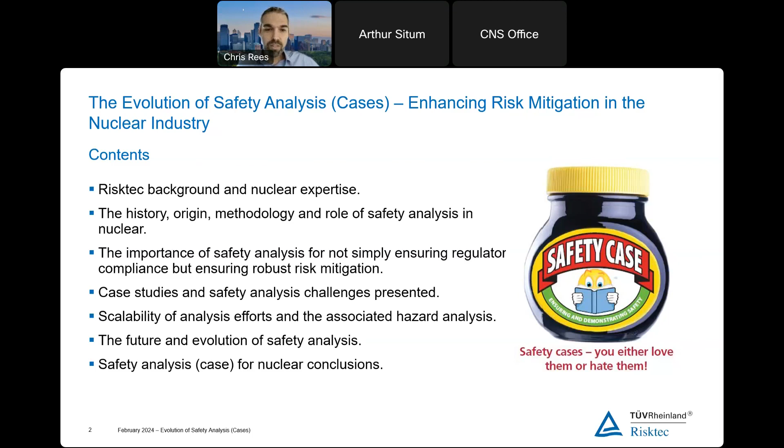I like this little picture here. So yeah, my accent, I am based in Canada, but I am from the UK originally, as Arthur said. So I'm very much a big fan of Marmite. If you do see Marmite in the supermarket, you're supposed to either love it or hate it. And similarly, I think, with safety cases, you either love them or hate them. So by the end of this presentation, hopefully you'll love them a little bit more.

So, Risktec Solutions Canada. I'm based out of Calgary, and we've been operating in Canada since 2011. And we have a number of offices in North America.

Some facts about us. We currently have over 300 full-time employees, 16 offices across the world. We work across a number of industries, so transport, defense, nuclear, clean energy, oil and gas. So we work with various different companies and clients on high hazard, high risk industries. And we'll talk about some of the nuclear examples today.

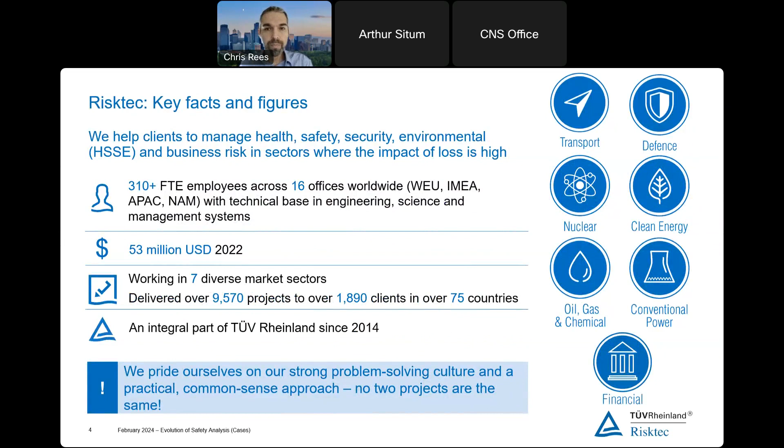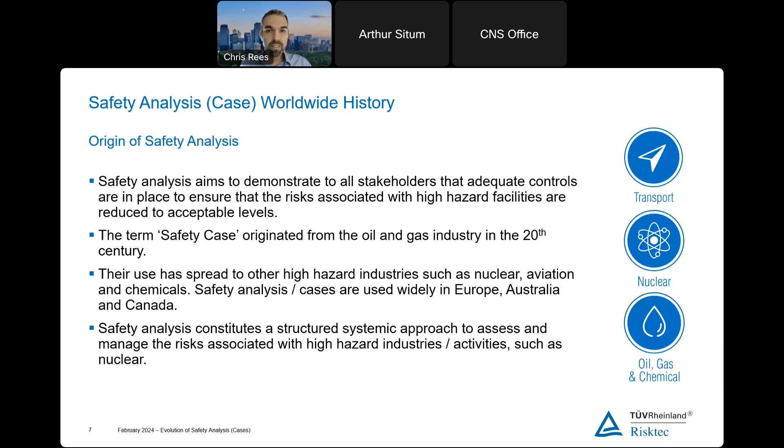Now, looking back to the late 1980s, Piper Alpha was an offshore oil platform operated by Occidental, I think that's how I say it, I probably said that wrong, Petroleum in the North Sea. At the time, it was one of the largest and most complex platforms in the North Sea. And on the 6th of July 1988, an explosion and fire destroyed the platform completely, killing 167 of 226 crew on board.

Now, the explosion itself was caused by a leak from a pump that was temporarily removed for maintenance, and there were several factors that contributed to the incident, including inadequate safety procedures, lack of proper communication between staff and in emergency arrangements, the design of the platform, so the location of the crew quarters was in close proximity to operations and the explosion itself, and the emergency response systems and actions.

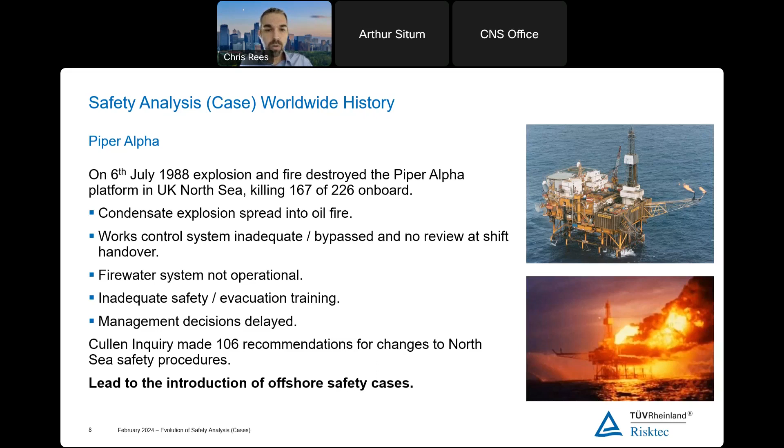Following this, the Cullen inquiry made 106 recommendations to the North Sea safety procedures, and the disaster prompted significant changes in regulation and practices, leading to the introduction of safety cases. So that's why Piper Alpha is important. That is where the modern term safety case or safety analysis really comes from. And just a couple of the photos here. The top right one shows Piper Alpha before, and the bottom one, Piper Alpha during the fire and explosion. So quite a catastrophic incident.

So following on from Piper Alpha, we saw safety cases and safety analysis being brought in across a number of different industries, including the UK Ministry of Defence. Now, again, it's important to learn how the evolution of safety cases progressed by looking at some of the incidents. So the Nimrod MR2 was a Royal Air Force or RAF maritime patrol aircraft, shown here in the picture. Now, it had a safety case for operations and subsequent safety analysis to support that, and risk management, risk assessment, and safeguards.

On September 2nd, 2006, the Nimrod was on patrol in Helmand province in Afghanistan, and it suffered a catastrophic mid-air fire. And this was only minutes after it had completed air-to-air refueling, and it led to the complete loss of the aircraft and the death of 14 on board.

So the explosion itself was attributed to the fuel system, namely fuel leaked onto a hot element. And the inquiry concluded that the safety case for Nimrod was fundamentally flawed, and effectively it was just a paper exercise. You know, it's a large stack of paper. There was little control for modifications on the system, maintenance, or true safety oversight from the Ministry of Defence.

Further, the inquiry recommended that safety cases should be renamed as risk cases rather than safety cases, and that they should be shaped, so they should be succinct, they should be homegrown, they should be accessible and proportionate and easy to understand and document light, so not safety case in paper. And they recommended the simple definition of a risk case as a reasonable confirmation the risks are ALARP, or as low as reasonably practicable levels.

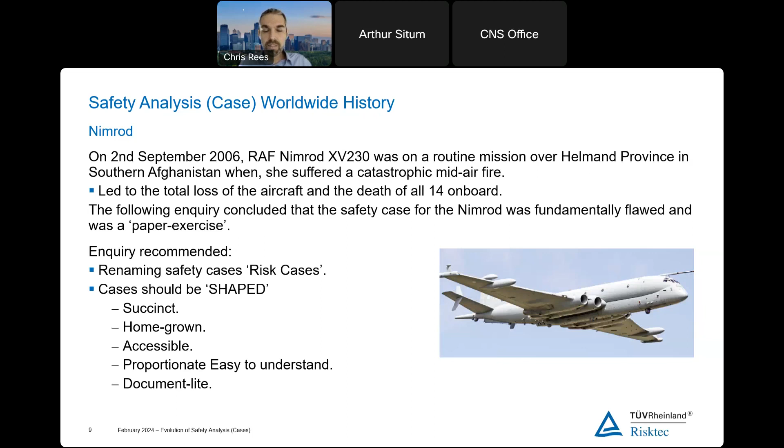So safety cases, we need to understand the evolution to understand where we are, to understand where we're going, and Piper Alpha and Nimrod are some of the key incidents that lead us to where we are now. So since the creation of safety cases, there have been many myths or misconceptions about safety cases, some reflecting the difficulties in the 1980s and 1990s, and then later, and the incidents like Nimrod and Piper Alpha that we discussed.

So further, there is this conception that the safety analysis that you do is just for the regulator, where in reality, the case is developed by the operator, for the operator. At the end of the day, we all want our staff or our employees to go home safe, and that safety analysis is part of that, irrespective of what you're demonstrating to the regulator. So safety analysis represents good practice.

It is the working document to improve safety produced by those who have the most knowledge. That's one of the key things. It's produced by people who understand the plant, understand the operations, the plans, the build, etc.

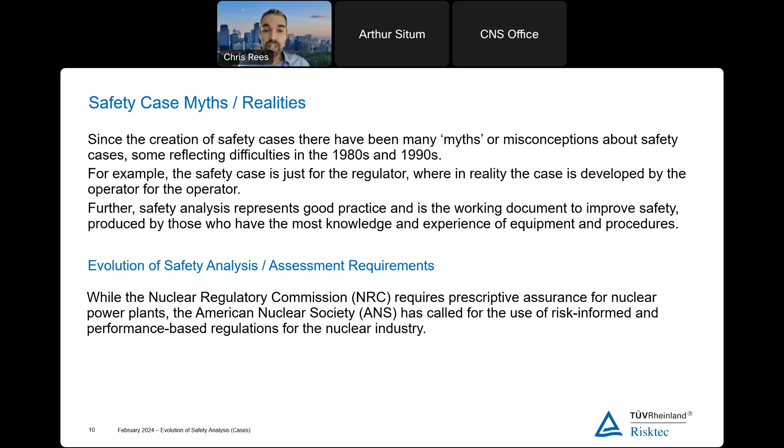So while in the US, the NRC still requires quite a prescriptive approach for nuclear assurance, the American Nuclear Society recommendations have called for risk-based, performance-based regulations. So we might see that starting to evolve, and we do see that starting to come in more, arguing that risk-informed regulations use insights from probabilistic risk and things like that to focus safety resources on the most risk-significant issues, thereby achieving an increase in safety while simultaneously reducing unnecessary regulatory burdens. So we're not sending everything to the regulator, we're actually doing some deterministic assessment as well.

So where do we sit at the moment in the Canadian nuclear market? So current safety analysis in Canada. I'm sure some of you on the call will be aware of the regulatory regime and how it sits, but for those that are not, this is an overview. So Canadian nuclear sites are governed by the CNSC, the Canadian Nuclear Safety Commission, and that sits under the Nuclear Safety and Control Act. So the CNSC provides the regulatory guides for licenses and how to comply with regulatory requirements.

So if you're operating a nuclear site, how do you comply with the regulatory requirements? How do you get a license to operate? The safety analysis for a proposed activity or facility is covered by the CNSC REGDOCs. So they include advice on hazard identification, safety measures, etc. And all nuclear site operators in Canada must present a strong case to obtain a license from the CNSC.

And the safety case is part of that, and that includes the documents on how the regulatory requirements are met or exceeded. These documents cover all the major safety areas such as physical design, human performance management, safety analysis, waste management, radiation protection, etc. And then the safety case needs to be maintained and updated through the facility's life cycle. So that might be construction, that might be operation, that might be decommissioning. And the assessment will include both a deterministic and a probabilistic safety assessment.

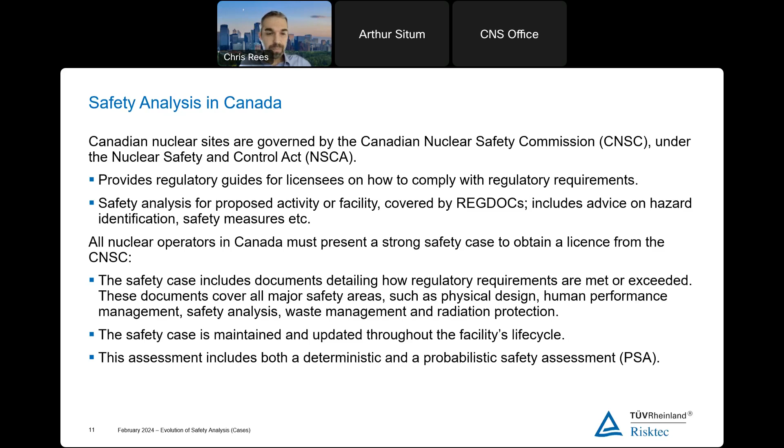So how do we actually go about the safety analysis? So we know that we need to produce a strong case that shows why all our control measures are identified, all our hazards are identified. So this section will discuss the methodology for safety analysis, presenting a systematic and a comprehensive approach to hazard identification, risk assessment, and identification of safety measures.

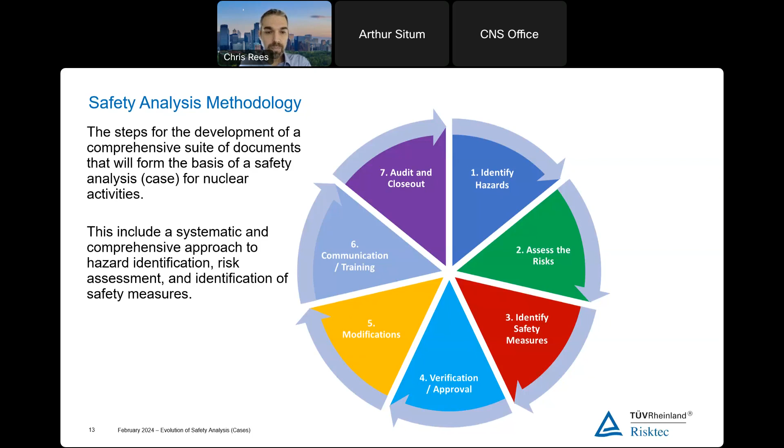So step 1 is hazard identification. We're identifying the potential hazards associated with operation of the system or the plant. This can be done by various hazard identification techniques, such as HAZOP, FMEA, SWIFT. FMEA is failure modes effects analysis. SWIFT is structured what-if technique, so asking the questions, what if this happens, what if that happens.

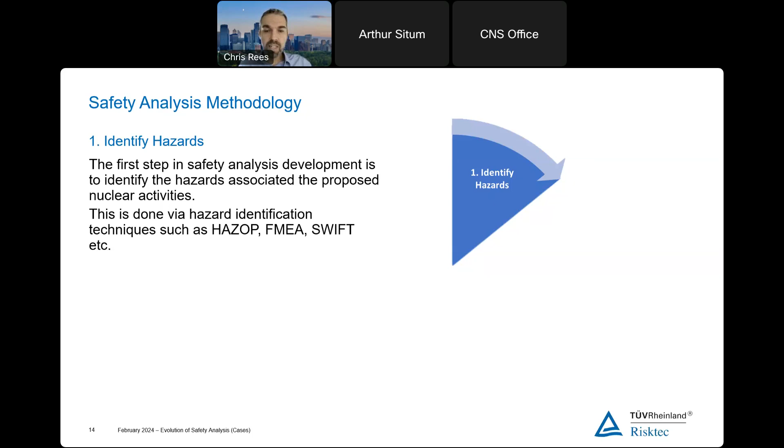These various hazard identification techniques are scalable to the level of hazard presented from the proposed activities, and we'll talk a little bit more about that later in the presentation, but that becomes key going forward and for best practice safety analysis.

So step 2, risk assessment. We're going to assess the likelihood and the consequences of the identified hazards, using deterministic or probabilistic risk assessment. When we say likelihood, we mean how often is this going to happen a year? Are we going to have an aircraft impact once a year, or is it going to be once in 10,000 years? Are we in an earthquake zone?

Are human operators going to get things wrong? We're flawed as humans. We get things wrong quite a lot. So what's the performance? What's the likelihood of things actually happening? And then the consequence: what's the radiological consequence, in this case, for nuclear?

Specifically, we would then look at deterministic and probabilistic risks to see where we can screen things out. So deterministically looking at them, and then when perhaps we can't, looking at the probabilistic risk to determine the tolerability of the identified hazards.

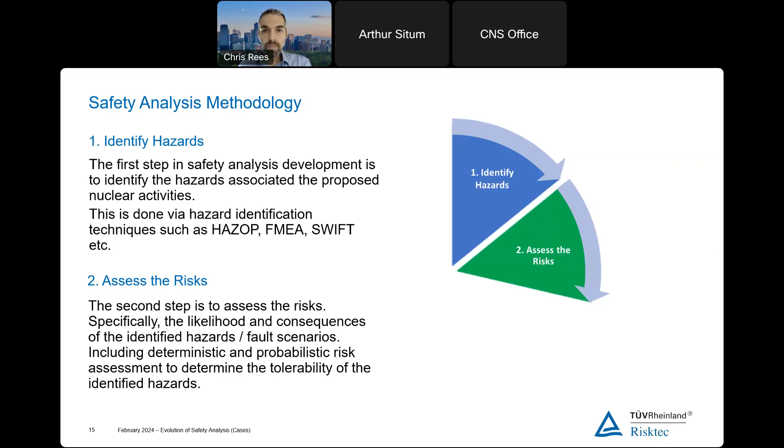So step 3, identification of safety measures. We need to establish the safety requirements and the standards based on the level of risk associated with hazards. If we have something that's very low risk, low hazard, we're not going to have a very robust safety measure against it because it's not required. It might be something procedural, etc.

If we've got something that's high risk, high hazard, then we may have engineered controls, we may have shielding in the case of radiation, things like that. So we have to scale those safety requirements and safety measures partly to what's required to bring the doses down to acceptable levels, but partly for regulatory requirements as well. So here we would identify, assess, and implement those safety measures and controls to mitigate the identified hazards and record that in our safety analysis.

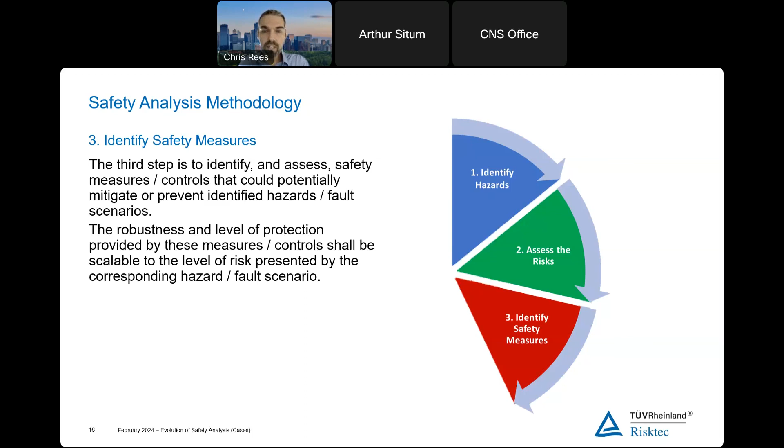So step 4, one of the key ones. We've produced the safety analysis. We've started to build our case of why our plant or activity is safe. Then we need verification: independent review and verification of the assessments and case. And then we look for regulatory or internal approval of the case as well.

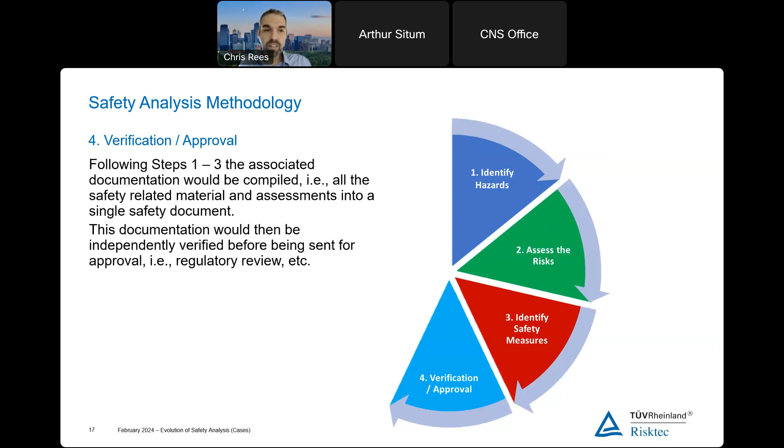And then step 5. We've got our case, we've done our internal verification, but then the design changes, the plant changes, the activity changes. So we need to implement a process to review the status of the case or the analysis and ensure that it remains live. Keeping that case or analysis live forms a crucial part of the process, because any modifications to the proposals of the plant can change what we previously said. So we need to ensure that we keep that case live, we actually access it, we actually keep it up to date.

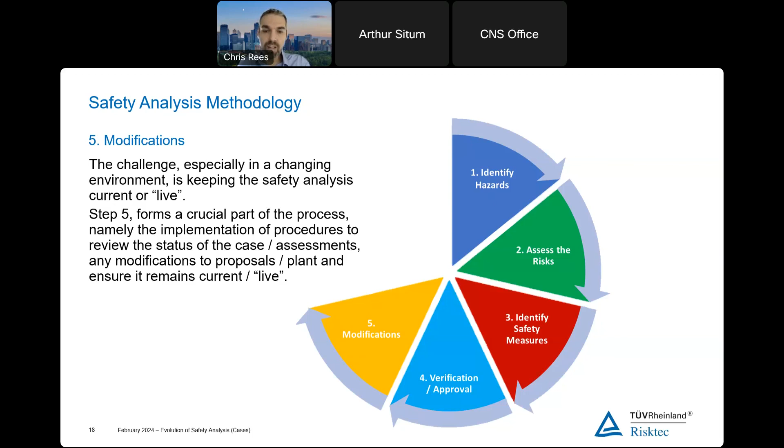And then communications and training, step 6. So communication of the safety measures and claims from the case to the key stakeholders. We'll talk a little bit more about this later on, but if we make claims from the analysis that an operator is going to do X, Y, and Z, they need to be aware of that. We need to communicate to our stakeholders what we're going to do, what safety measures we have, and how we actually perform.

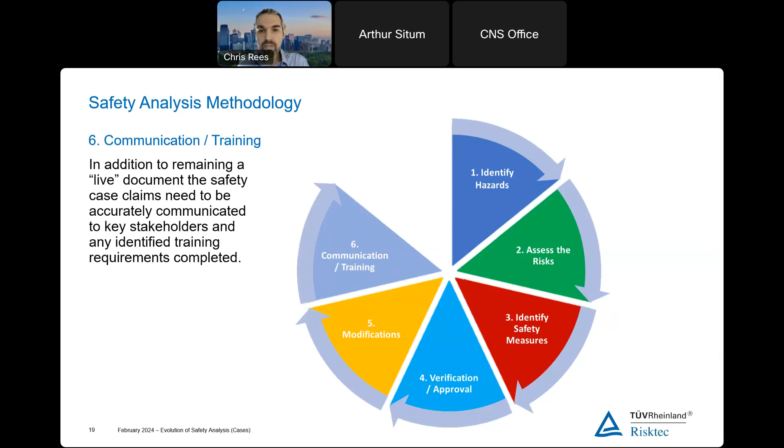And then the final step of the analysis of the case is the closeout: the closeout of the case itself and the associated documentation. This ensures that the current state of the plant, the systems, etc., is captured and any claimed safety measures are removed, so we're not leaving things onerous for the future. Further, the lessons learned from the project are captured for future works. And then documentation: we can compile all that safety case documentation, and we can finally close it out.

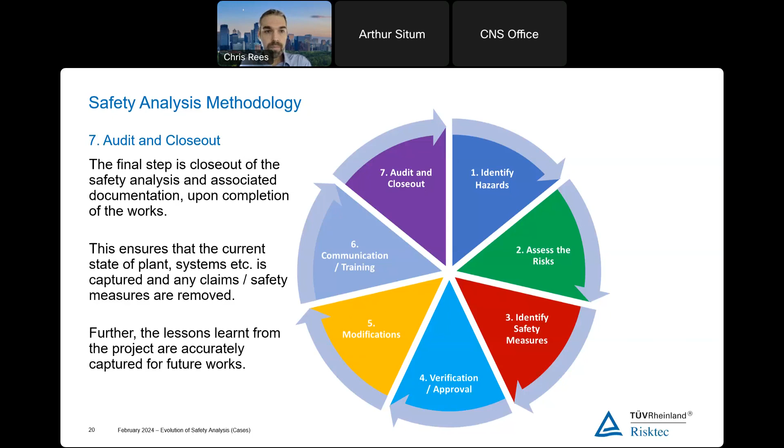Okay, so we've spoken a little bit about setting the scene, where we are, how to get best practice, and how we actually do safety assessments.

We've got a number of case studies today that we'll talk through and some of the safety analysis challenges behind that. So the first one is a site that I worked at. So this is Hinkley Point in Somerset in the UK. We were talking about the interim storage facilities and the safety cases behind that for Bradwell, Berkeley and Hinkley Point nuclear sites. And this is the first interim storage facilities for Magnox, who operate the sites.

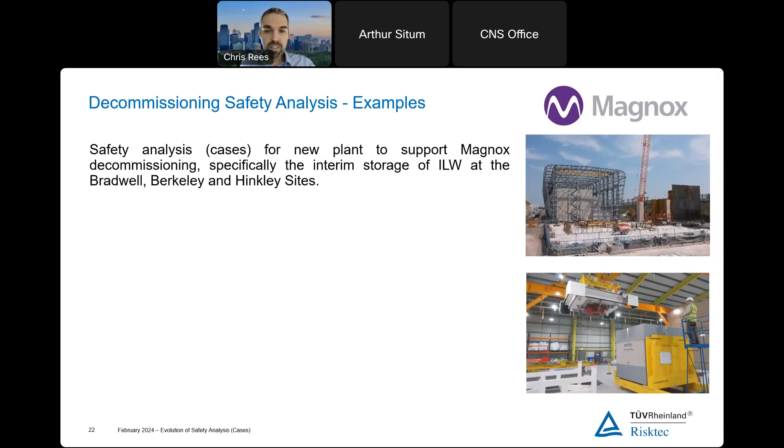So Magnox Limited, they've just rebranded as Nuclear Restoration Services, but they constructed these stores when they were still known as Magnox. They're responsible for safely decommissioning the first generation of nuclear reactors and research sites across the UK. And here we focus on the safety analysis for new plant or interim storage facilities to support the decommissioning activities, specifically at the Bradwell, Berkeley and Hinkley sites.

So the interim storage facilities are designed with a lifetime of 50 to 100 years. They're constructed alongside reactor sites, so they're still on their licensed sites. The photos you see here show in construction and complete loading. So the top right one is interim storage facility in construction, and the bottom right we've got a concrete waste package being loaded.

We had to look at the impact of potential external events over extended period of time. So rising sea levels, earthquake risk, de-staffing of the site is part of the concerns for safety and security, because if you imagine most of these sites are going through decommissioning, there won't be anything left on those sites, so they will be largely de-staffed. So how do you maintain security, etc., and how do you maintain the case when you haven't got many staff on board?

They're regional stores, so they have slightly different decommissioning timelines, and they have slight variations in design and size. They have varying waste types, so they're primarily all intermediate level waste. Some of them are wet, some of them are dry. So how do you process that? How do you store that? And then the licensing challenges, so a separate case for construction, for operations, and for storage.

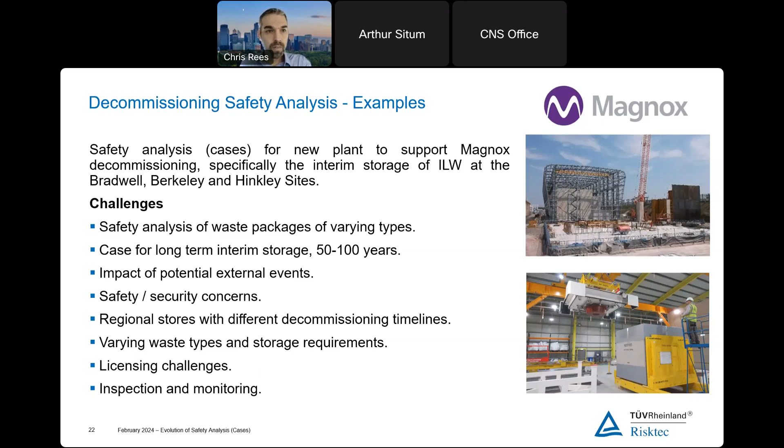And the second case study that we'll talk around today, the safety analysis of Norwegian nuclear decommissioning activities at NND. So in 2018 and 2019, the 2 research reactors in Norway were permanently taken out of operation. And NND is an agency under the Ministry of Trade, Industry and Fisheries in Norway, responsible for decommissioning of the research reactors and other nuclear infrastructure. So NND is responsible for safe handling, storage and disposal of nuclear waste in Norway itself.

So the use of previous assessments for safety assessment and engineering processes that were appropriate for operational plant were not appropriate for decommissioning activities here. So if you imagine we've got procedures and analysis for an operating plant, and then we move into a decommissioning phase, the hazards are not the same. So once the fuel is removed, you've got a different hazard profile, and therefore the procedures that you use for assessment for operations may not be appropriate for decommissioning.

So deterministic safety assessment criteria, for example, that was used to prevent core melt was unsurprisingly onerous when applied to comparatively low consequences associated with decommissioning activities scenarios. So some of the revised strategies that came out of the challenges were the screening out of faults with low radiological consequence, so what we talked about a little bit earlier on, a scalable approach to safety analysis, considering the use of safety measures that are lower in the risk reduction hierarchy, defining a safety classification scheme that avoids overclassification of engineering structures,

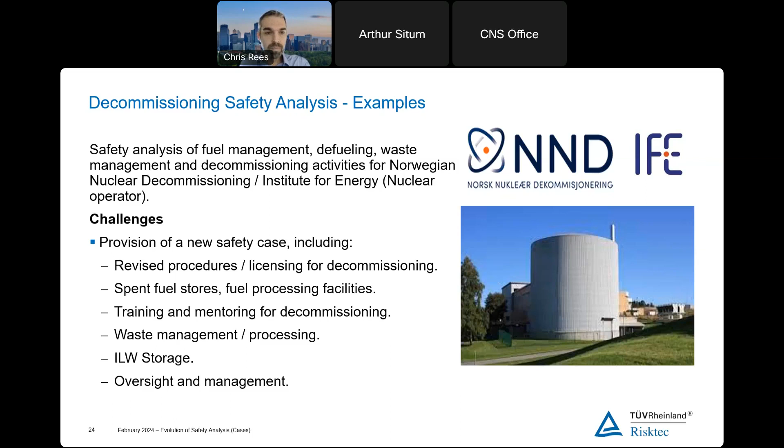So case study 3 we'll talk about today is the Canadian-based Terrestrial Energy molten salt reactor and the preliminary safety analysis and siting report. So Risktec were involved in developing and authoring the molten salt reactor vendor design review for phase 1 and phase 2 submissions to the CNSC, and this was for the Darlington site.

So some of the challenges behind this: it's a first of a kind advanced reactor design, so there's little precedent and failure data associated with that. It had some novel challenges to model passive safety systems and failure modes of the safety systems, such as the reactor vessel itself. It was the first reactor in Canada to go through the VDR assessment with the CNSC, and the concept design was changing. So we had those modifications coming in, so constant change in design, which could often significantly affect the safety analysis that was done.

It also was set in a scene where there were changes in the regulatory regime, especially on the security side of things, and the developing of SMR guidance from a Canadian standards point of view, but also from the CNSC. So there was a significant opportunity here with this safety analysis to apply a risk-informed design. So the early development of PSA was able to feed into the design options and analysis requirements, and demonstrate secure by design and also safeguards by design principles.

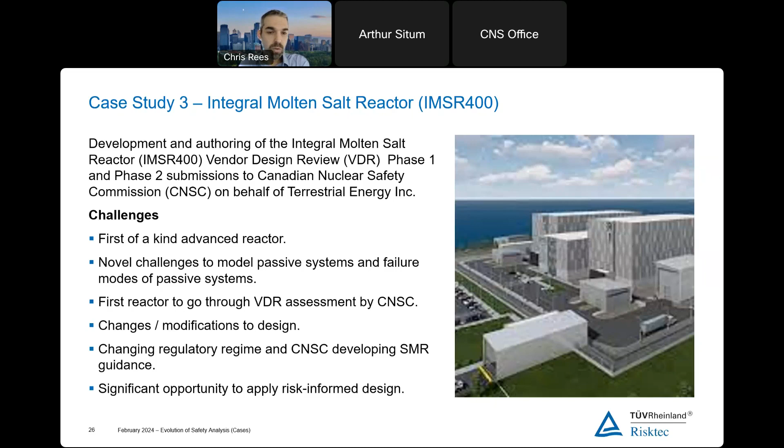And then the last case study that we'll talk about today is Sizewell B. So Sizewell B is an operating PWR site, and we'll talk about replacement of the condensate tanks and the case behind that. So for those who are not aware, condensate tanks, or CSTs, are important structures for temporarily storing condensed steam before going into the steam generator after it returns from the turbine in a pressurized water reactor, so PWR.

Now, some of the challenges here: this was the development of a safety case strategy first off, before any of the analysis was done, and then looking at the safety functional requirements and substantiation reports for this condensate tank. So this was replacement of the tanks. They're critical infrastructure, so they have to be maintained and still operational while the replacement is going on. And this required multiple submissions to the regulator, covering construction, foundation, deconstruction, tanks, pipework across the board, a lot of different areas.

And then demonstration of nuclear safety during construction, where you've got new tanks adjacent to existing and operating plant. Hazard qualification for extended feed water pipework, and then development of a commissioning plan that aligns with a tight timescale. So this was an operating plant, and this demonstrates some of the things we were talking about: control of modifications, control of impact on adjacent plant, and then multiple submissions to the regulator.

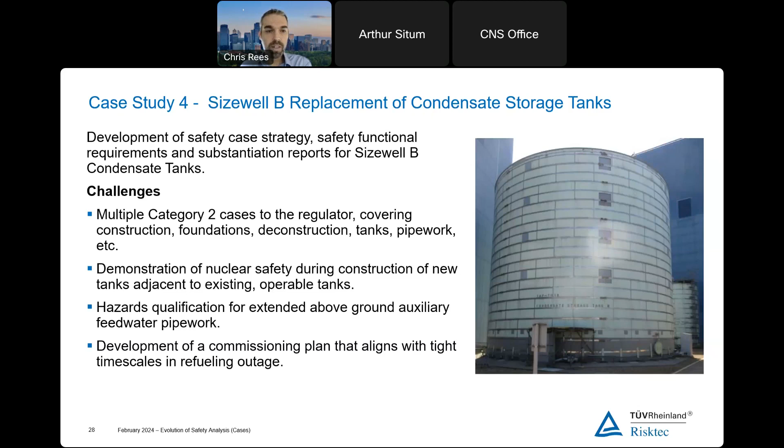So where do we see the future of safety analysis, and what areas can we focus on?

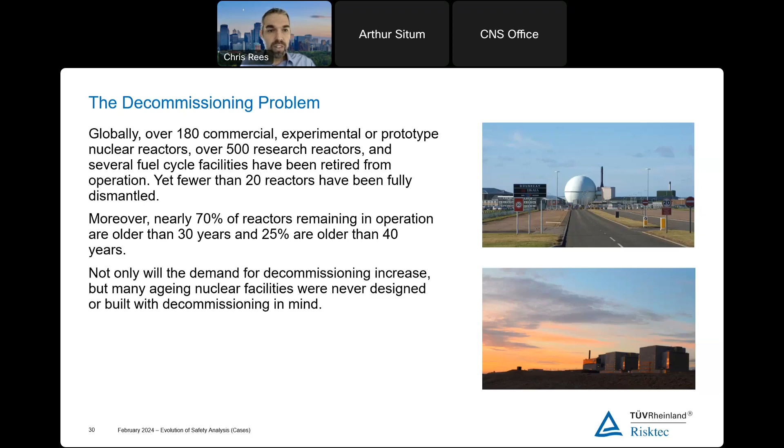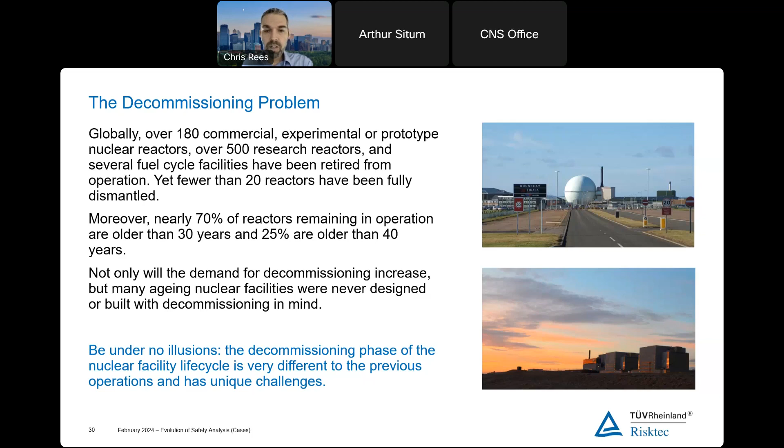So, like I said, not only will the demand for decommissioning increase, but also we have to keep new build in mind and how we successfully decommission this. And we should be under no illusions, the decommissioning phase in the nuclear industry is very different to the previous stage. The hazards might be lower, but the challenges are unique. What can we bring to that decommissioning problem? Safety cases for nuclear decommissioning need to evolve to the unique challenges of shutting down reactors and safely dismantling nuclear facilities. The evolution of safety cases or safety analysis typically involves some of the key considerations we've put here.

So removing safety systems could potentially erode defense in depth. We need to keep in mind that things that were claimed during operations, perhaps now we are going to start removing, but we need to look at defense in depth. We may introduce new activities and associated hazards. We're going to be breaking into areas that perhaps were never intended to be broken into. We're going to be removing waste that was planned for very long-term storage or was never planned for retrieval. Accurate characterization of radioactive waste: a lot of these plants were built in the 60s and 70s, and we need accurate characterization data of what is actually put in some of these vaults or storage areas.

And it's a focus on waste management as opposed to power operation. So it's a different mindset. We are taking things apart, we are knocking things down, we are managing the waste as opposed to continuous operations. And then things like periodic safety reviews, so looking at the state of the plant periodically and revising that safety

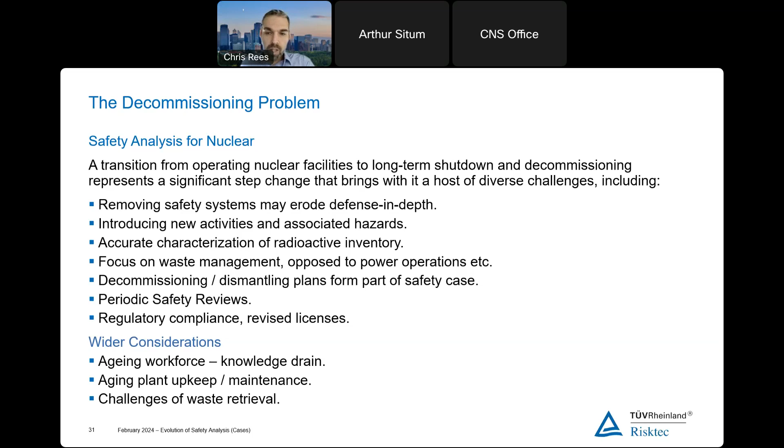analysis. And then wider considerations: we've got an aging workforce, the operations have ceased, we may have people retiring, people leaving, we have a knowledge drain, aging plant, upkeep, maintenance, and then challenges of waste retrieval.

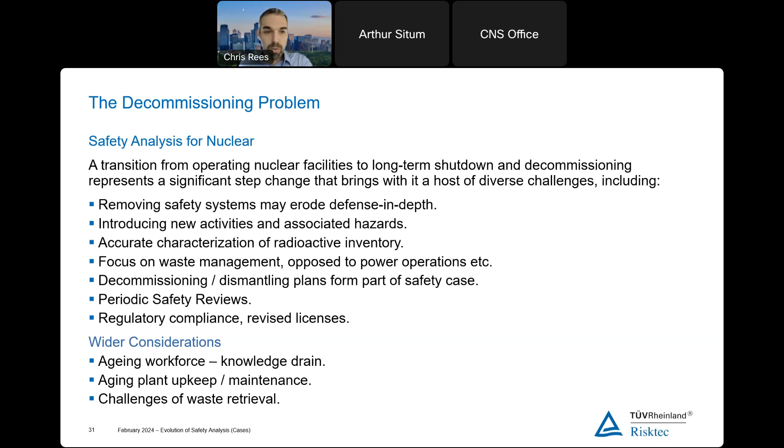So I was talking to Arthur before this presentation, and I think the CNS last year gave a presentation where they said they needed 5,000 to 10,000 new engineers just for the Canadian nuclear industry over the next decade. So that is a lot of people to bring in, a lot of engineers.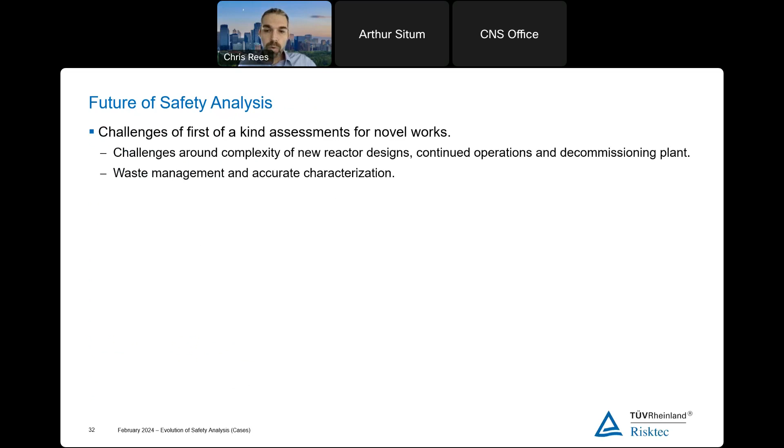So wider challenges and the future of safety analysis. We've got challenges from first of a kind safety assessments for novel works, for SMRs, for new reactor designs, and the challenges around continued operations as well as waste management and characterization. So what are some of the evolving or new tools and methodology that we can bring to some of these new designs and these new problems, even in the operations and decommissioning world?

So deterministic and fault tree analysis. We've talked a little bit about deterministic assessment and how that can screen out faults, but also the probabilistic risk side of things. That integration of human factors. So something that was not considered in the 1960s, 1970s design: human factors and ergonomics and safety claims behind operator interactions. We can bring that into the design, but also into the safety analysis.

Safety and security concerns. That's something that we see more and more in safety analysis and the associated cases, that a lot of these sites have lower staffing and lower levels of security. We don't have armed guards, etc. So what's the safety justification for that? And a holistic approach to decommissioning activities. What we mean is that they then start to consider environmental impacts, industrial safety, not just nuclear and radiological.

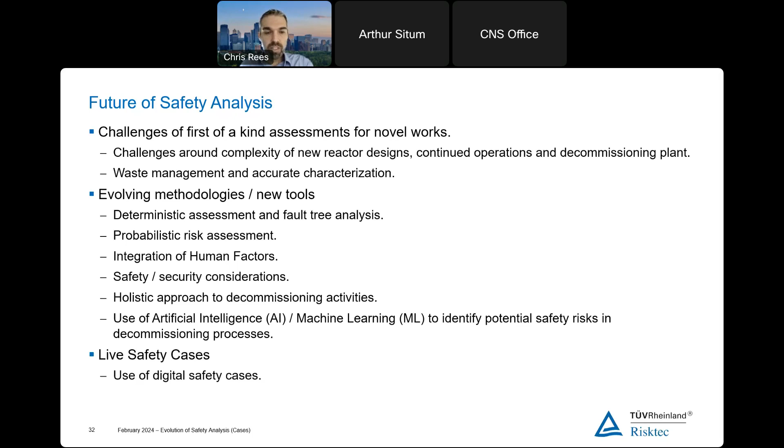The use of AI and machine learning to identify potential safety risks in activities. And then the use of digital safety cases, and we'll talk a little bit more about that in the coming slides.

And then carrying on, the wider challenges and opportunities for us going forward: regulatory compliance, so evolution of the regulatory regime, funding for new build, but also for decommissioning activities, and ensuring that the analysis we do is fit for purpose and there is value in that safety analysis. We've talked a little bit about the human resource and the staffing to actually continue operating some of these plants, but also moving into the new world.

We've got aging infrastructure. We need to look at emergency preparedness for those legacy hazards. And then the regulatory landscape, so risk-informed regulation, where we prioritize those safety critical issues, and then we look at deterministic and probabilistic risk assessment, possible flexible licensing strategies, continuing that stakeholder engagement throughout the whole process that we talked about, steps 1 to 7, but also that wider international collaboration, so sharing of knowledge and best practice.

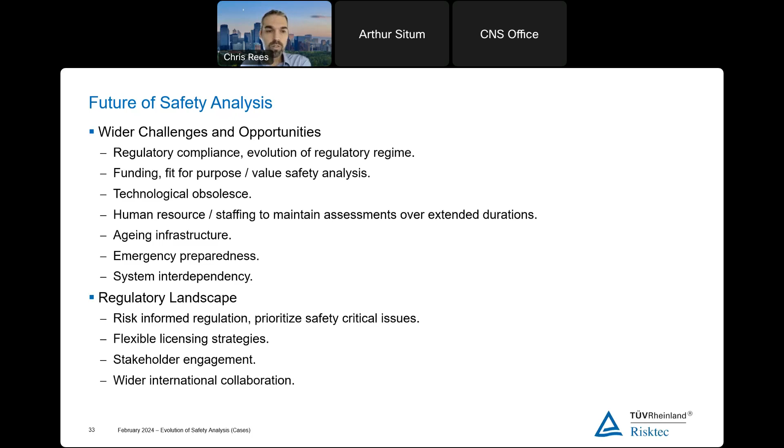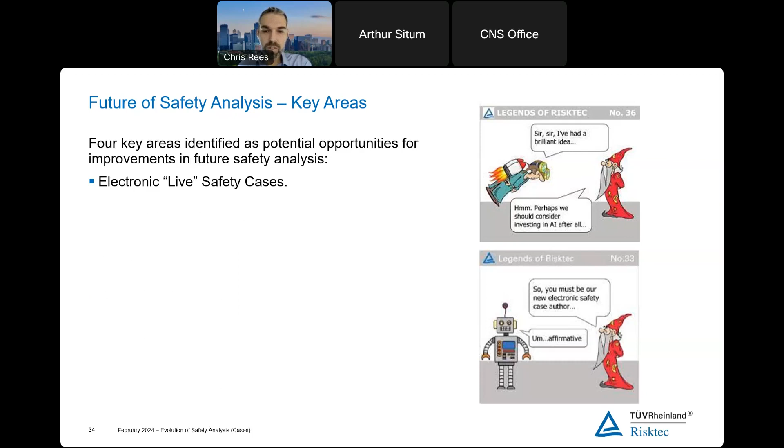So just to start to wrap up, we'll talk about the future of safety analysis, and we'll pick on a couple of those key areas that I talked about before. Namely, we'll talk about electronic live safety cases, or e-safety cases, which is very nicely demonstrated by our Legends of Risktec here. So you must be our new electronic safety case author. I hope he doesn't look like that, but we'll talk about what an e-safety case actually looks like.

We'll talk about integration of protection measures and the claims from safety analysis. We'll talk about operationalizing a case and engaging the workforce, and then a succinct and scalable safety analysis. And this is all while still engaging with the regulator or other key stakeholders, and then learning from the wider industry.

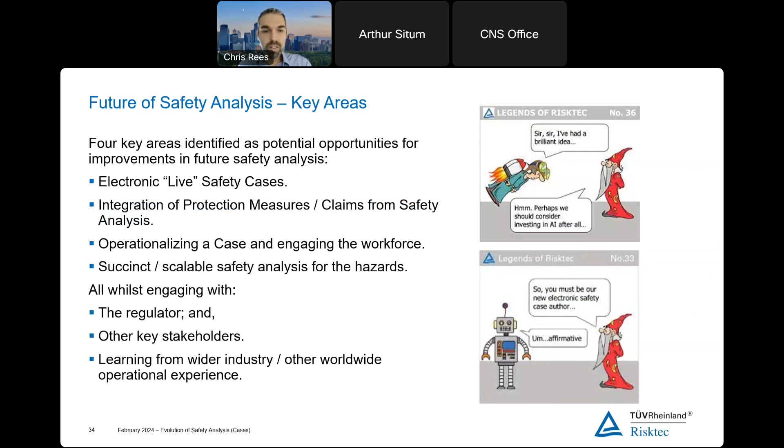So the electronic safety case, or e-safety case concept, has been around for a long time. It's struggled to gain widespread traction, perhaps because of its perceived complexity in the past and the need for bespoke software. In reality, these days, we see electronic safety cases with relatively simple software that make them a lot more accessible. But its purpose and the information presented remain the same as a traditional safety analysis, i.e. to describe the case for safety. For example, identifying the most significant hazards and controls available to ensure the risks are acceptably low. It includes safety critical equipment and human actions that need to be taken.

The key difference between your stack of paper and your e-safety case is that it's interactive. In the diagram we've got here, you can see that you can click links. This means you can navigate, you can connect to the information. So this is a Risktec example. It's available on an iPad or an iPhone, so the tablet side of things. And the idea is it's accessible anywhere on site, and you can just click and see the relevant information.

But in developing that case, we need to say who are the users, who needs what information and at what level, and how is that information accessed. So the level of sophistication and interactivity can be tailored for an e-safety case to suit the organization's intended use. For example, if we were producing an e-safety case for submission to the regulator, they would focus on the key hazards, and leading through the arguments to show that they are ALARP or ALARA,

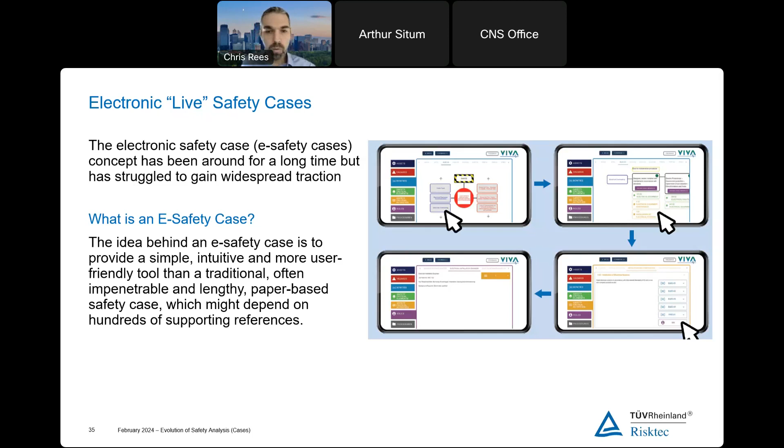whereas an operator may be more interested in understanding the critical context of their day-to-day roles. Why shouldn't I push that button? Why do I need to push that button? Why is that shielding there? What's protecting me?

So in order for a safety case to be effective, the document and any supporting studies need to be available to the people who need to use them. So the protection measure claims are key. Managers will need to see an overview of what protection measures they've got claimed out on plant. Engineers will need to see the details under their relevant discipline or their job and understand why the things they've got in their area are important, where they're claimed back to that safety analysis.

So that's where the e-safety case comes in. They can trace that golden thread back to the safety analysis. Why is it important that I push this button? Because it does X, Y, and Z, and it's claimed in the safety analysis, and that all links back to our license to operate.

Further, barrier management allows those responsible for managing and maintaining the barriers to understand and to record progress. For future developments in safety analysis, we see the use of Bowtie software to visualize safety measures and controls, but we also see an integration of maintenance management systems and barrier auditing into those protection controls.

And then operationalizing your safety case, so engaging your workforce. Once that case is delivered, there is an opportunity to truly embed it in day-to-day operations. And we need to think about how do I use it and what's expected of me. The aim of operationalizing is to provide the right information to the right people in the right way. What a technician might need to understand is quite different to what their supervisor might need. So we would look at a rollout.

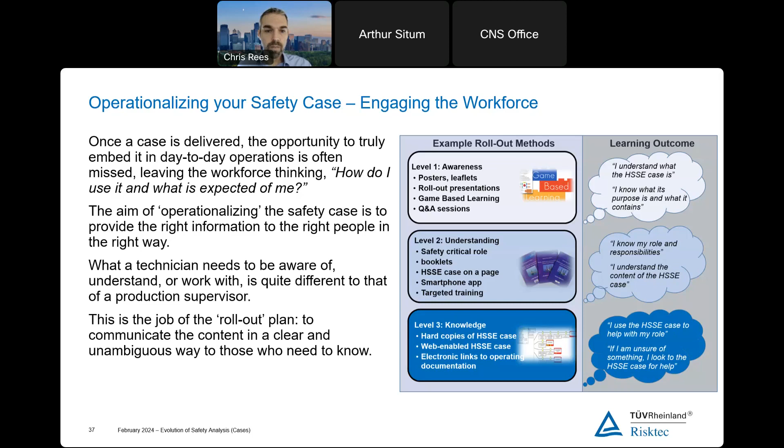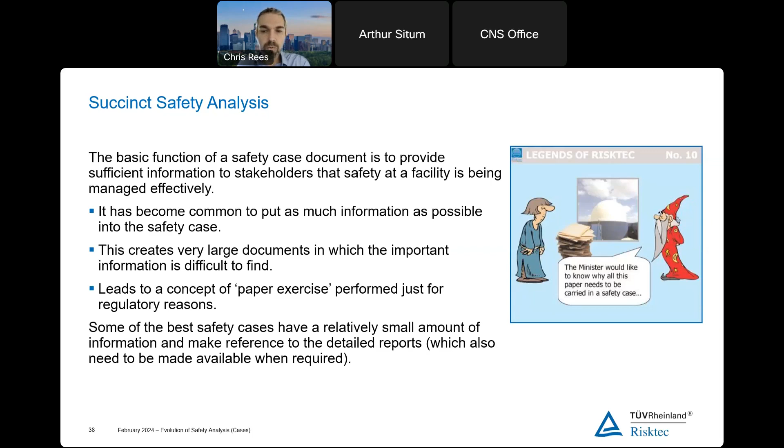So the problem we've seen in the past is that it can have safety cases that are very large, difficult to navigate, and this leads to a concept of that sort of paper exercise, as the Legend of Risktec is showing very well here. Some of the best safety cases in reality have a relatively small amount of information, and they make reference to detailed reports, so they reference out to that information rather than including it. So that comes back to that shaped safety case.

And then finally, scalability. So the time and effort spent producing a case should be proportionate to the risks. We talked a little bit about that earlier with screening things out, but it should be proportionate to the risk presented by the facility and the operation. So a small plant with a high fatality potential may need more effort than a very large plant with a low fatality potential. And we shouldn't be afraid to screen out faults with justification and documentation.

So rather than doing that paper exercise, we can screen things out. We just need to justify and document like that. And then working on that culture where operators believe that every study needs to be completed. So we do need to do a safety analysis, but what is that level of rigor and justifying why?